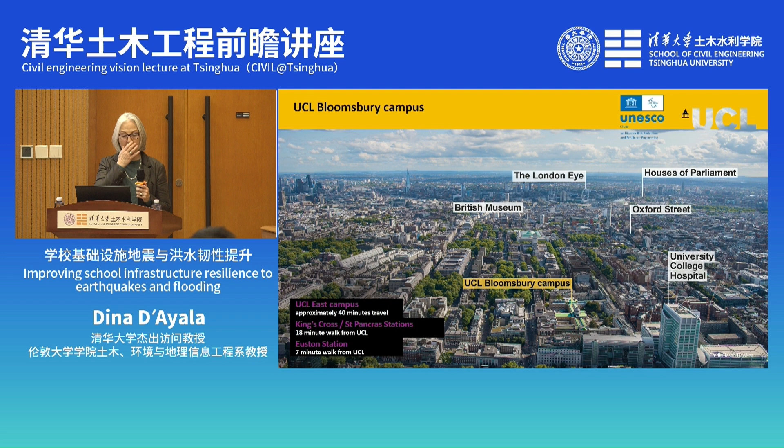Let's come to the Faculty of Engineering, which has many remarkable similarities to Tsinghua's Department of Civil Engineering.

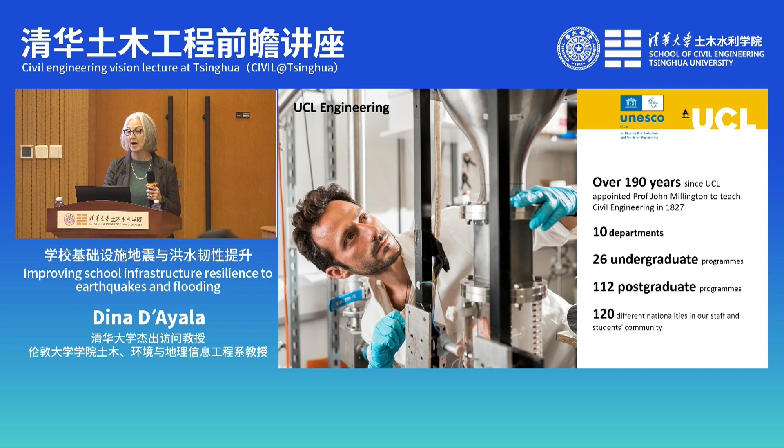The Faculty of Engineering Sciences is over 190 years old. The first professor appointed in engineering at UCL was a professor of civil engineering, tasked with improving urban conditions—especially the roads and the sewage system for public health. It now has 10 departments, 26 undergraduate programs, 112 postgraduate programs, and more than 120 different nationalities—quite an international outlook.

In Civil, Environmental and Geomatic Engineering, we have a diverse academic group of about 70 staff, covering structure and infrastructure design—as in my case—through to transport, circular economy, disaster risk reduction, and the more traditional hydraulics, geotechnics, and so on.

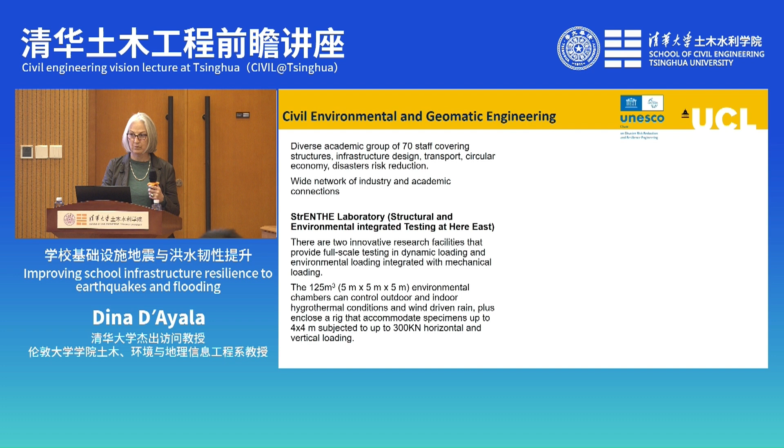We have a wide network of industry and academic connections. Over the past five years I had the pleasure of setting up the StrENTHE Laboratory—structural and environmental integrated testing—at Here East. This is quite an innovative facility because, for the first time, we bring together environmental conditioning and testing with mechanical testing, as you can see in the green frame.

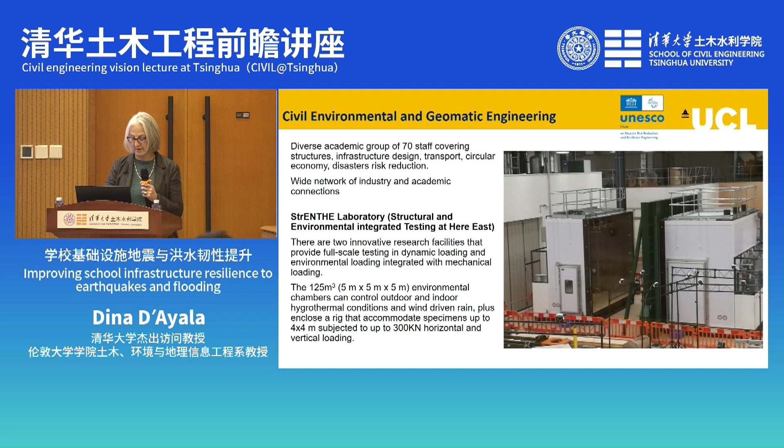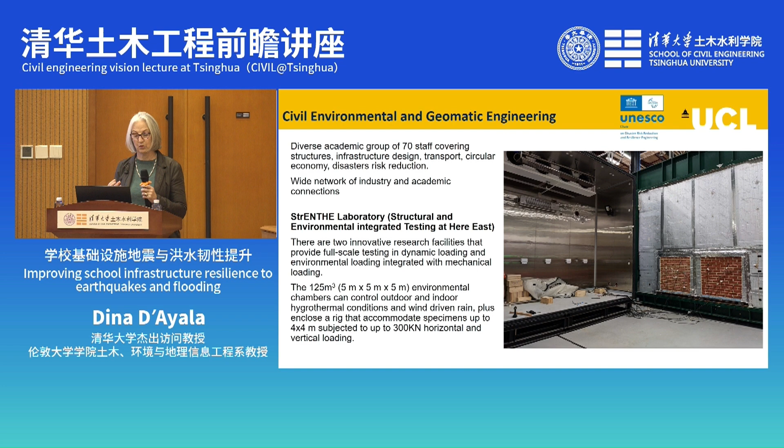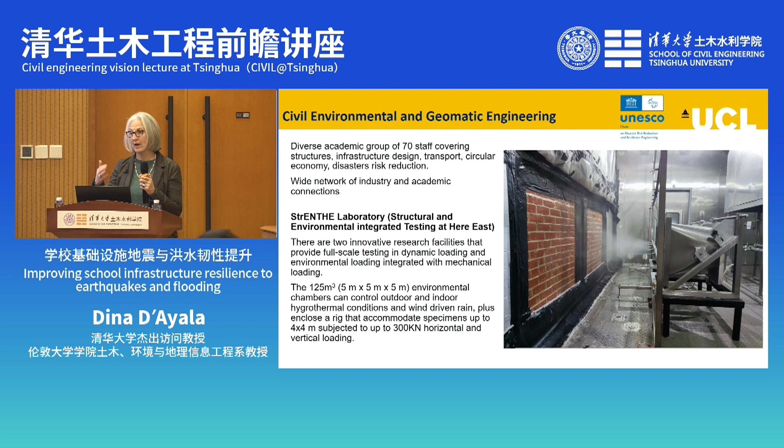If you open these two frames, you see something like this: two environmental chambers that can control both outdoor and indoor hygrothermal conditions, and also produce wind-driven rain, plus accommodate specimens up to 4 meters that can be subjected to up to 300 kilonewtons of horizontal and vertical loading. Very small compared to your new facilities here, but still significant for London, where there was previously no facility like it—quite large structures that allow us to test full-scale structural elements.

Another element: we are also very concerned with sustainability and sustainable structural engineering. So next to the chamber, we also have this rig, which is very large.

It's 9 meters long by 4 meters wide, and has 4 servo-hydraulic actuators, which can transfer up to 1,200 kilonewtons, doing high cycle fatigue testing. We can run several tens of millions of cycles to test new sustainable composite structural systems with low carbon footprint.

So what you see there, for instance, is a composite of steel and cement-free concrete deck. But also we test stone and timber composites, and this is the work of my colleague, Professor Wendel Sebastian.

Out of the activity and the research that we do in this laboratory, we have set up an MSc in Sustainable Structural Engineering. This is the first year that the MSc is running, so for those of you that intend to come and study more structural engineering in the UK, please have a look at it.

This course will provide you with the skills required to lead the design of safer, more resilient, and smarter buildings. The teaching is industry-led and design-based, and you will explore structural engineering within the climate emergency context, the net zero issues, well aligned with the UN Sustainable Development Goals.

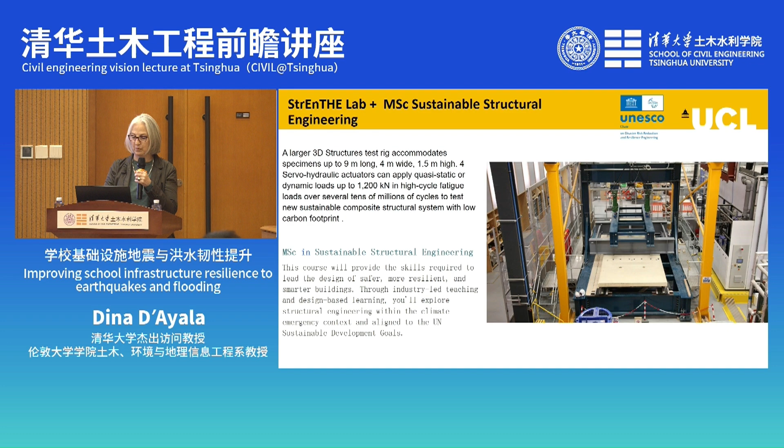The type of teaching that we do within the civil engineering department is a bit different from many more traditional civil engineering courses. For instance, an undergraduate course that I contributed to developing with colleagues from the architectural and environmental engineering faculty is the MEng in Engineering and Architectural Design.

This is the first course of this type as an undergraduate degree in the UK. We have the 3 disciplines in 1 degree, and it lasts 4 years. It's an integrated design program which combines architectural knowledge, creativity, and vision with evidence-based structural and environmental engineering.

What is very important is that the graduates of this course are then able to become either architects, civil or structural engineers, or building services engineers, or what is currently very topical in the industry, at least in Europe, facade engineering, i.e. the integrated way of making a building breathe and stand at the same time.

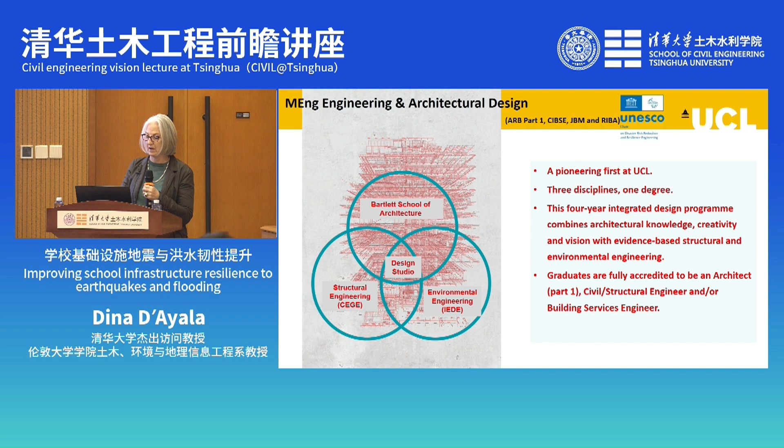So this is a bit of an overview of what we do at UCL. I will now introduce the UNESCO Chair, which both Professor Dongping and Professor Qingchen Lu already referred to.

The UNESCO Chair was initiated in 2021. It's called the UNESCO Chair on Disaster Risk Reduction and Resilience Engineering, and tries to develop effective methods to assess and mitigate the risk of damage by natural hazards to existing and new school buildings. In this way, the Chair contributes to improving equity of access to safe learning environments for children in vulnerable communities by ensuring continuity of education services, reducing lost school days and lost lives at school.

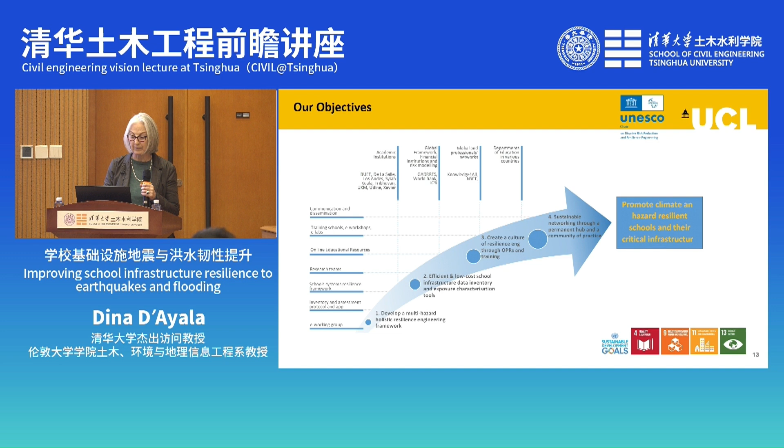The idea is that we promote climate and hazard resilience in schools and their critical infrastructures. So the first objective is to develop a multi-hazard holistic resilience engineering framework. Some of you might know the Global Alliance for Disaster Risk Reduction and Resilience in the Education Sector.

This organization brings together, for instance, the UN, UNESCO, the World Bank, but also the Red Cross and so on, and other global organizations, and has issued the Comprehensive School Safety Framework, which along with the Sendai framework tries to bring more safety and security to the education sector.

So the first pillar, which is of particular relevance to engineers, is safer learning facilities. If we look at the way that we define risk in structural engineering, considering the hazards, considering the vulnerability, and considering the exposures, then if we can quantify risk, we can then deliver resilience.

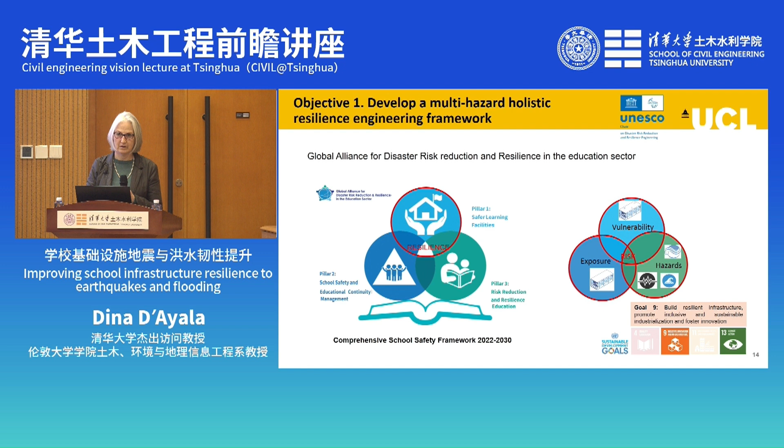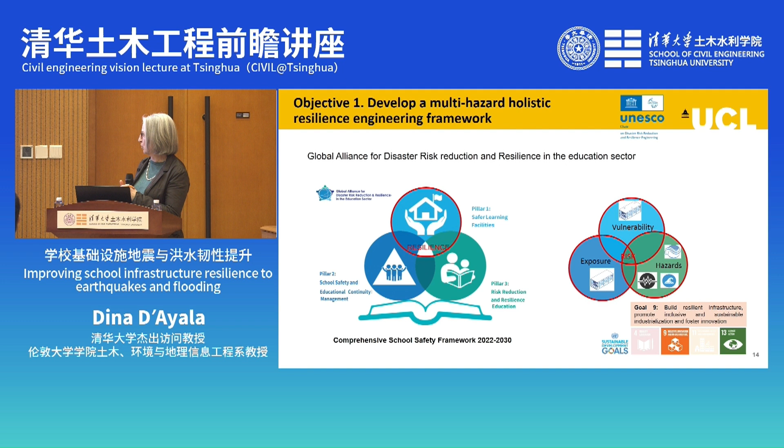That's the framework within which we try to work, and this framework helps us achieve Sustainable Development Goal number 9: build resilient infrastructure and promote inclusive and sustainable industrialization and foster innovation.

The second objective of the Chair is to develop efficient and low-cost school infrastructure data inventory and exposure characterization tools, and we have done this by collaborating quite extensively with colleagues, especially in the Philippines. Again, it's a long-term collaboration since 2017 with a number of different projects.

We try not only to characterize and minimize education disruptions, but also to build affordable and accessible decision support tools that local communities can use to look at what resources they can use locally in order to improve the behavior of their schools.

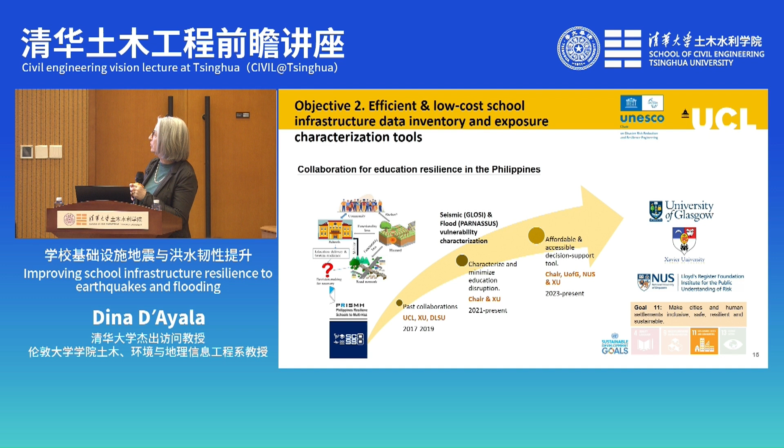And we have done this collaborating with the Lloyd's Register Foundation, Xavier University in Cagayan de Oro in the Philippines, and the University of Glasgow.

The third objective is to create a culture of resilience engineering with online resources. Since the inception of the Chair, which is almost at the end of its 4th year, we are 6 months away, we have run 35 webinars in 36 months. In fact, one of the webinars was delivered by Professor Dongping and Professor Nan a few months ago in the first term. All these webinars are also available online on our YouTube channel, so people that have not had the opportunity to listen to them live can go back and learn from it.

This leads us to our fourth objective, which is sustainable networking through the permanent hub of a community of practice, which we are now developing with more than 3,000 people from almost 100 different countries attending those webinars and continuously commenting. We try to hold the webinars once a month at lunchtime in UK time, which is evening in the east and early morning in the west, so that everybody can possibly link in, and you are all welcome to attend. They are open to everybody, and open for discussion afterwards.

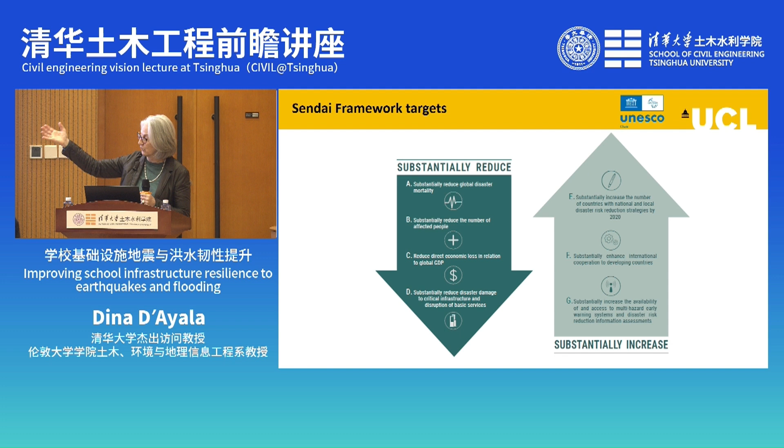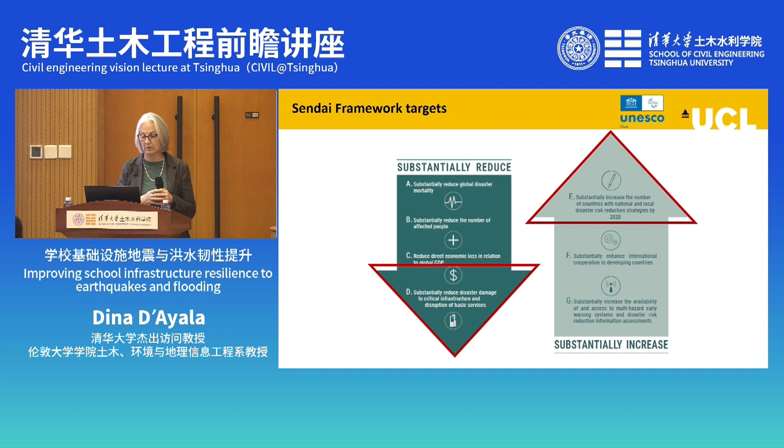Of these targets, today I will briefly refer to targets D and E, which are particularly relevant to the issues of risk reduction and resilience in the education sector. Target E talks about the number of countries that adopt and implement national disaster risk reduction strategies in line with the Sendai framework for disaster risk reduction. The second target is the percentage of local governments that adopt and implement local disaster risk reduction strategies in line with national strategies. So first the national strategies, then the local strategies, using information provided at the appropriate level of government below the national level with responsibility for disaster risk reduction.

The D target is about reducing the number of destroyed or damaged educational facilities attributed to disaster. So you see the Sendai framework has quite specific information about the reduction of damage to school infrastructures.

By doing this, we can fulfill mainly the first 3 sustainable development goals, 9, 11, and 13, but by fulfilling those goals we also reduce poverty and improve quality of education. If the infrastructure is better, we will have better clean water and sanitation within schools, better affordable and clean energy, and people with better education will have better work and economic growth, which will then lead to peace, justice, and strong institutions. So the sustainable goals are always strictly connected to one another.

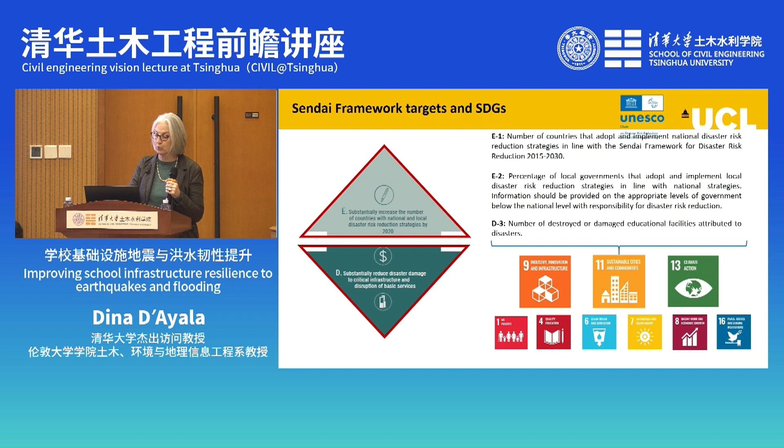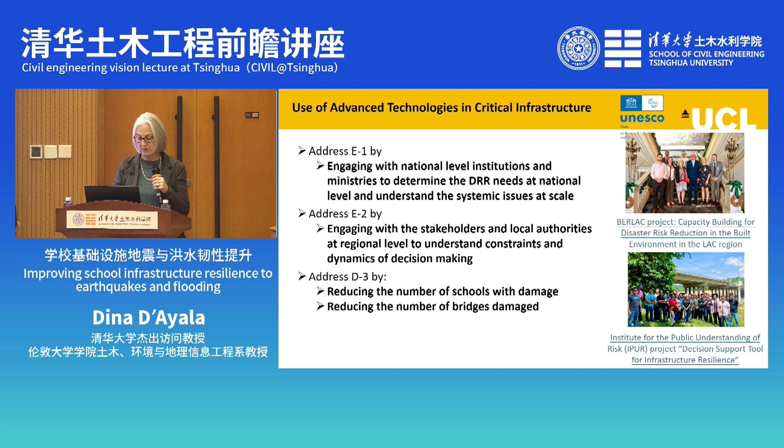What do we do with the UNESCO chairs and with the use of advanced technology to assess critical infrastructure? We try to engage with national level institutions—for instance, in the Dominican Republic, directly with the government through the BERLAC project—or with stakeholders and local authorities through projects in the Philippines. We address this by looking at ways of reducing the number of schools and bridges that are damaged, as we will see in a minute in our procedure.

What is the global framework? Besides the Sendai framework, I already mentioned the Comprehensive School Safety Framework in the previous speech, and again I draw your attention to Pillar 1. So let's go a little bit more into detail on this.

Pillar 1 is about safer learning facilities, and in particular safer and greener facilities that are built according to codes and standards. So it's very important that nations have standard codes, that there is construction quality control, that there is assessment and intervention for existing buildings, and that water, sanitation, and hygiene are also addressed.

The interaction between Pillar 1 and the other pillars also provides structural safety education, so people are educated to think about structural safety, building maintenance, and non-structural mitigation such as fire safety. By fulfilling these objectives, we really build child rights and resilience in the education sector. But to do that, we need to look at the existing building stock in the school education sector.

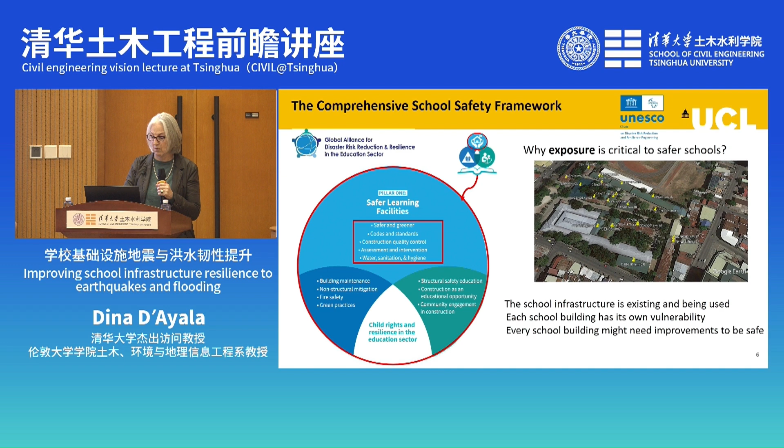But on the other hand, the school infrastructure already exists and is being used. Each school building might have its own vulnerability, and therefore every school building might need improvement to be safe. We need to quantify this. So what should we prioritize? Because clearly the resources at any given time will be modest or confined, and we won't be able to address the complete safety or renewal of school infrastructure at once in any country.

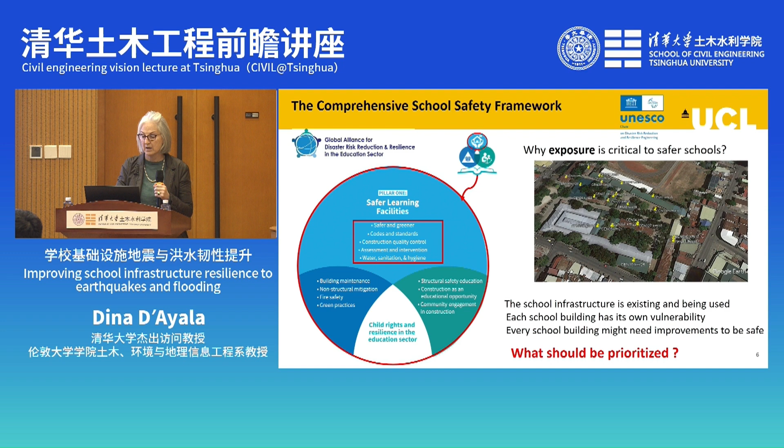So together with the World Bank, we developed GLOSI, the Global Library of School Infrastructure. The idea is that worldwide, schools typically have the same function as buildings from an architectural point of view, built in a very similar manner—a number of classrooms with corridors, connected together. So we can identify specific taxonomy or parameters that define each building from a structural point of view, and make a catalog of building types important not just for one country, but across many countries.

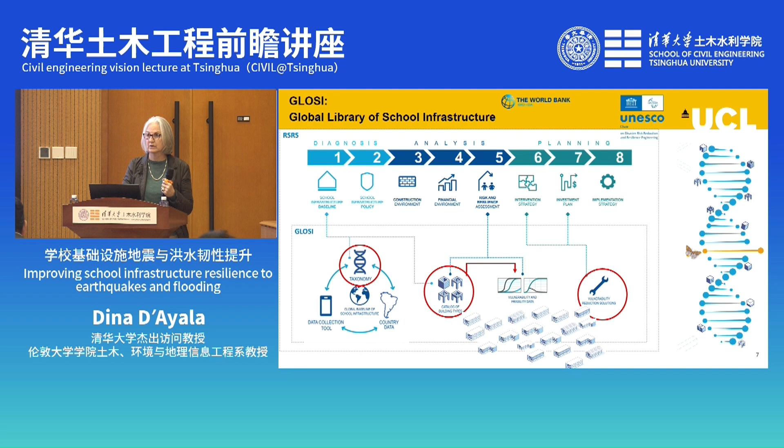Once we identify the building type using structural knowledge, we can identify the vulnerability and fragility data, and from that identify vulnerability reduction measures and solutions, quantifying them also in terms of cost. We can consider this taxonomy like the DNA of school buildings and school compounds.

But schools don't exist in isolation. For instance, if we look at this city, we can see a number of schools in the city center, with one further ahead. They are connected by roads and by bridges. If there was flooding here, clearly some of the bridges would be affected, creating a problem for pupils to get to school—and if a school itself is flooded, how can I move students to other schools?

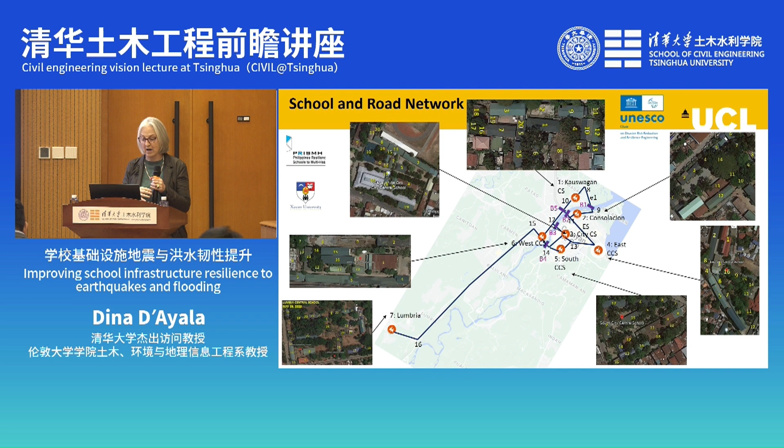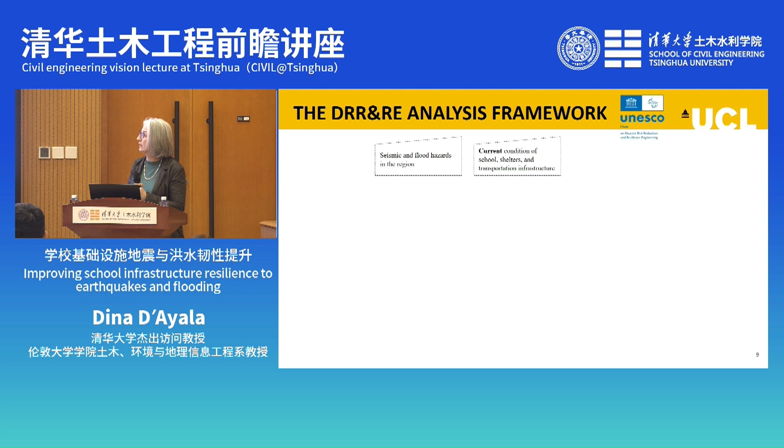At the same time, each of the schools has a different layout, different buildings, and therefore different vulnerability. So what is the disaster risk reduction and resilience engineering analysis framework we are talking about? First, we want this framework to work for different hazards—here we illustrate seismic and flood hazards, but it can also apply to windstorms, hurricanes, and typhoons. Secondly, we start from the current condition of both the schools, which are sometimes also used as shelters, and the transportation infrastructure.

We can then use Bayesian network and agent-based model, and I will explain in a minute how we do that, in order to determine the school resilience and therefore the education service disruptions. But we can also think of updated conditions and school shelters and transport infrastructures that can come from a set of pre-disaster interventions to improve the resilience of the system.

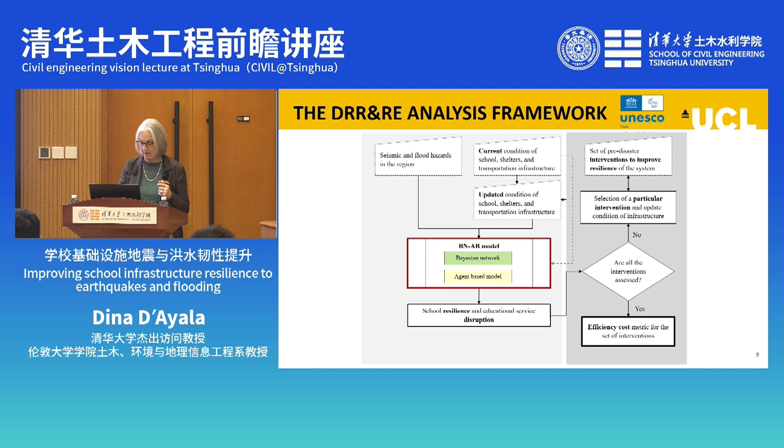So at each of these iterations, we can think if we can assess all the intervention possibly, yes. Have we identified efficiency cost metric for the set of intervention? Or if not, then let's look at selection of a particular intervention and start this tour again in order to improve the system. So in other words, how we are going to measure the effectiveness of the intervention. We can measure the effectiveness of the intervention in terms of recovery strategies.

If we look at this a little bit more in detail, we have a number of current infrastructure conditions which is affected by a hazard in the region. Now, the hazard is probabilistic in nature, i.e. we don't know where it will hit, when it will hit, with which intensity it will hit, but we can assume certain probabilistic distribution for each of these.

In the same way, for what concerns the assets, the school or the bridge or the road characteristics, we will have what we call fragility functions, but again, this will be probabilistic in nature. So we can use Bayesian networks, as we will see in a minute, in order to describe the uncertainty around the problem. We are then interested in knowing, after an event, in the current condition, what are the operational capacity state probabilities of each of the assets.

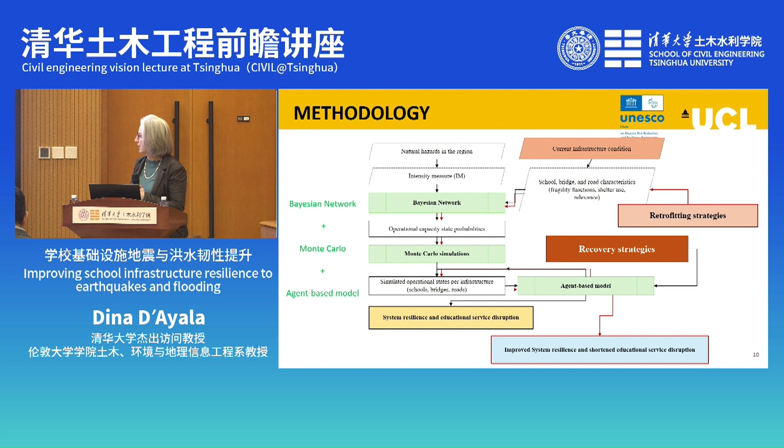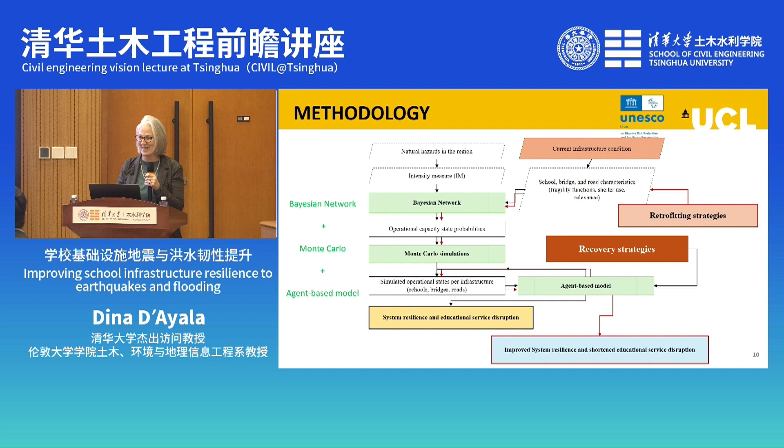But we can also bring in retrofitting strategies and then go through the same process and identify an improved system resilience and a shortened educational service disruption, which would also mean that, in extreme conditions, we will be in a position to save more lives. I will now try to illustrate a little bit more in detail this process, and then we will also look at an application very quickly.

So let's look at the Bayesian network first. The Bayesian network is a probabilistic directed acyclic graph where nodes represent variables and edges represent causal dependencies among the variables. The dependencies are quantified by the conditional probability of each node given its parents in the network.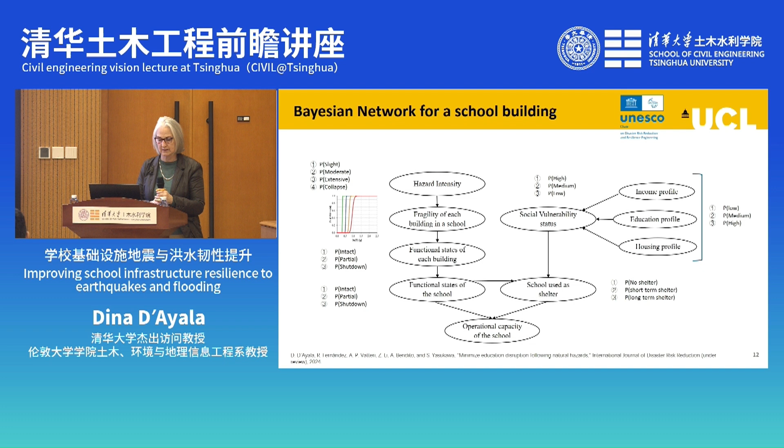I will have hazard intensity that, for simplicity here, we will consider as a non-probabilistic measure. So we will choose a particular scenario, and for that scenario, we will have a certain intensity at the site. Then, for that intensity at the site, through the fragility functions, the school will have at least 4 different probabilities of being in a given damage state. Given that probability of being in a physical damage state, I can then consider the functional states of each building, so whether it's intact, partial, or shut down.

Given the number of buildings in the school with this different probability of being intact, partial, or shut down, I can then consider what is the state of the school. The state of operational capacity of the school, i.e. the possibility of delivering lectures, will not depend only on its functional states, but will also depend on what we call the social vulnerability status of the community that is related to that school.

So if we look at the local community, we can look at the income profile, at the education profile, and the housing profile, for instance. These are just 3 indicators, but we can use other indicators. Depending on the level of these indicators, we can imagine that the social vulnerability of the community has different heights. For instance, if I have good houses, good education profile, and good income, I will react to a disastrous event in a different way than if I have a poor house, which might be directly affected by that event, and I don't have economic resources to, for instance, access a different shelter.

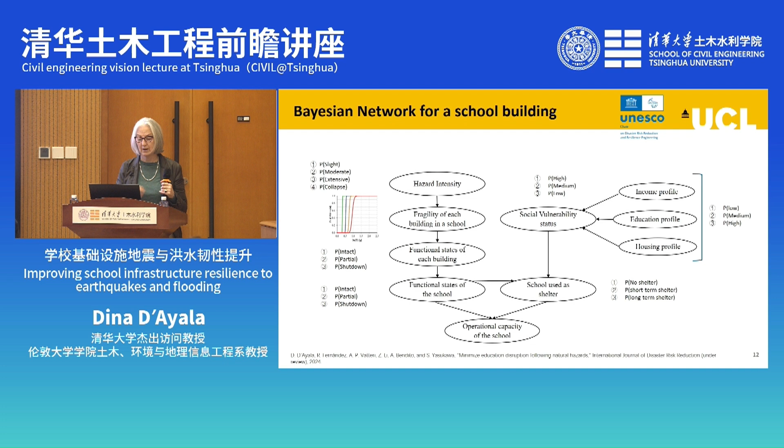So I will need the school as a place where I need to shelter for a certain amount of time until my home is going to be recovered. Then, if the school is used as a shelter, very often it cannot deliver lessons. It cannot be used for educational purposes. So by integrating these two elements, we can have the operational capacity of the schools. And this can be quantified in these terms.

So for instance, here we are considering two different scenarios. We are considering 12 different combinations of schools, which I will go into a little bit more in detail in the following. Oops. And it will give me different extremes.

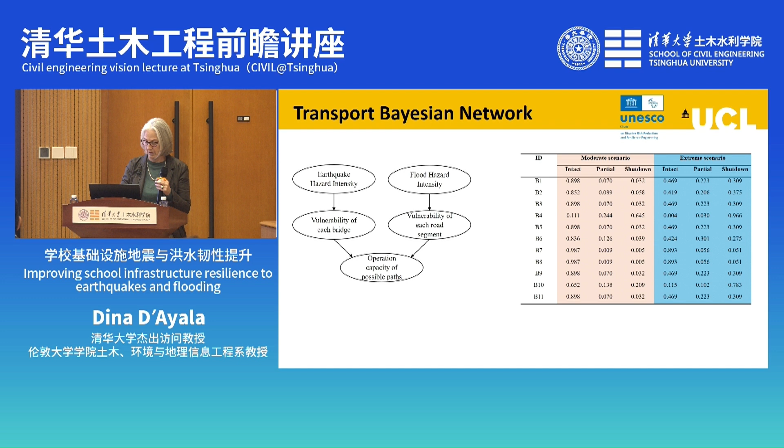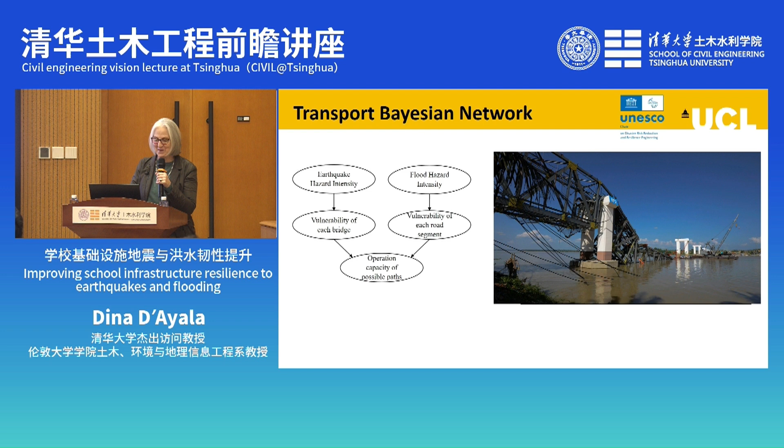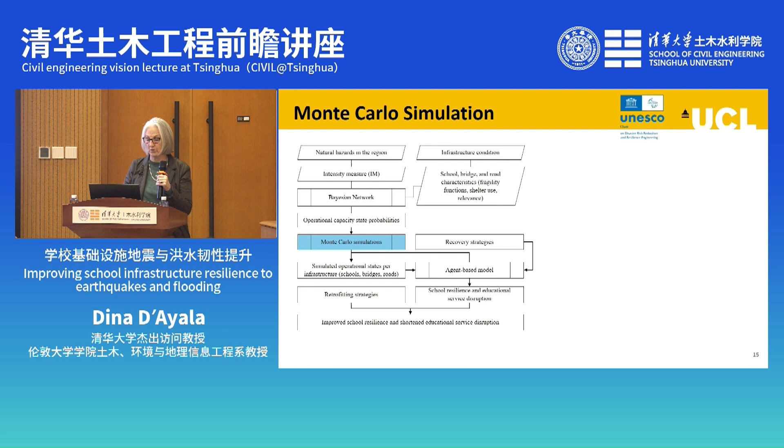So let's move on to the Monte Carlo simulations. So with the Monte Carlo simulation for this table of probability that you have seen in the previous slides, depending on the number of simulations, we will have different states and different combinations of the states for the system, for each of the schools. So this can be summarized in terms of probability distributions here. And as I said earlier, the larger the number of simulations, the more this probability distribution will tend to the probability distribution that we have looked at for the Bayesian network.

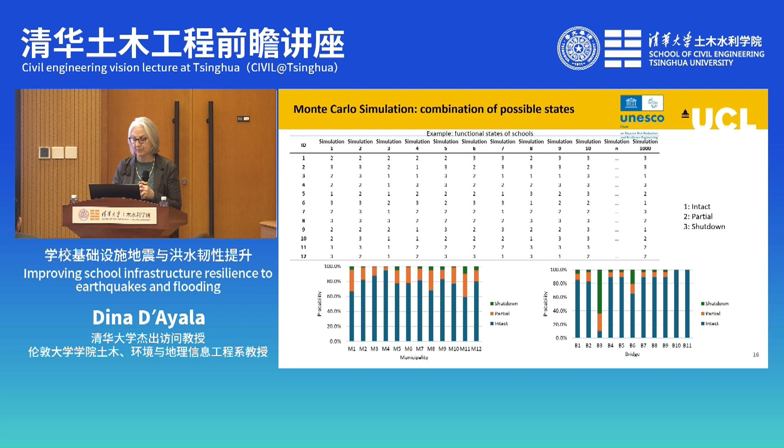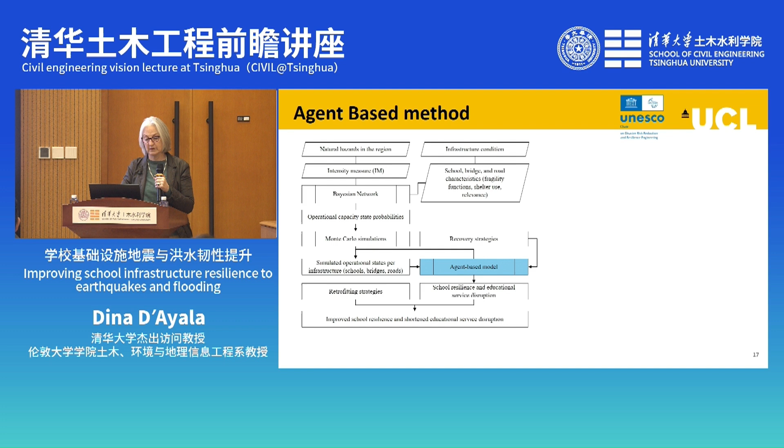Now, in order to understand how the recovery works, for each of these simulations, we will need to run an agent-based model. So if we have 1,000 simulations, then the agent-based model will have to run 1,000 times. And how does the agent-based model work? So the agent-based model works with two different agents. One that strives to retrofit the schools in the most efficient way, and one that strives to retrofit the bridges in the most efficient way.

But as you can see, I think there is a pointer here. Does it work? Maybe not. Can you see it? No. Maybe it's this way. No. It doesn't matter.

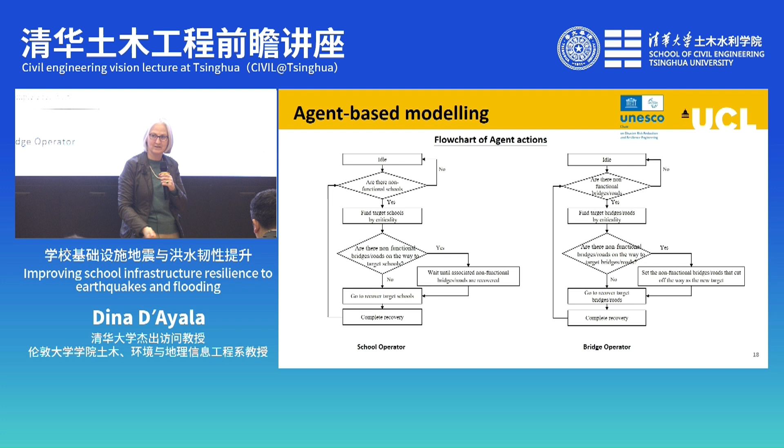So as you can see here, the agent for the school needs to wait until the bridge is fixed in order to go and recover the target school, i.e. if the road is broken and it cannot pass, then it cannot proceed. So for each of the school operator and bridge operator, the target is to find the next school by criticality, and by criticality we understand ranking of the schools and the bridges in different terms that we will see in a moment. But also the two agents are forced to interact with each other.

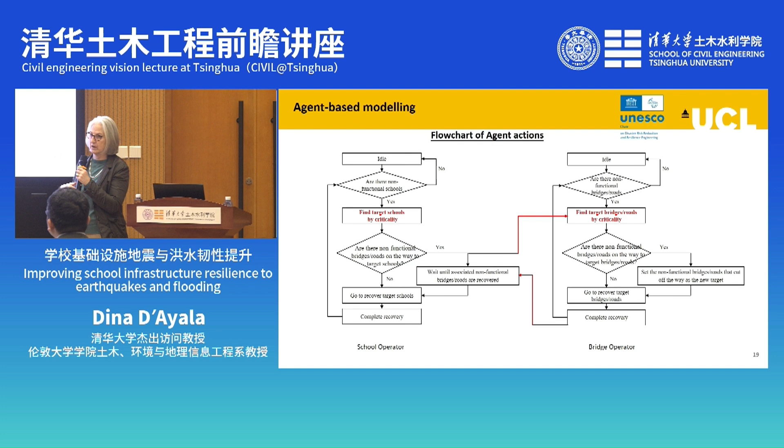I.e. one will need to complete the recovery and wait until that recovery is completed to unlock the next school that can be recovered. Or, in the other direction, the school operator can inform the bridge operator that he needs a particular bridge to be opened in order to recover the school. So he can influence the activity of the bridge operator.

So as I mentioned, we do this 1,000 times, and then we have a very wide distribution of the time to recovery in a moderate earthquake or in an extreme earthquake. As you can see, there is quite a dispersion there. But for the purpose of thinking about this, we can then use the median of that dispersion. So in the rest of the analysis, we will use these median curves. So now I'm trying to apply these concepts to the case studies.

And for these case studies, we have considered this wonderful place, which is San Pedro de Macorís, a province in the Dominican Republic. And the Dominican Republic is a country in the Caribbean which is affected by both earthquake. It's next to Haiti. You might have heard already of the several earthquakes in 2010 and 2021 that affected Haiti quite strongly. The Dominican Republic also had a strong earthquake in 2011. It has not had recent earthquakes, but it's very earthquake prone. And also has floods and hurricanes affecting it.

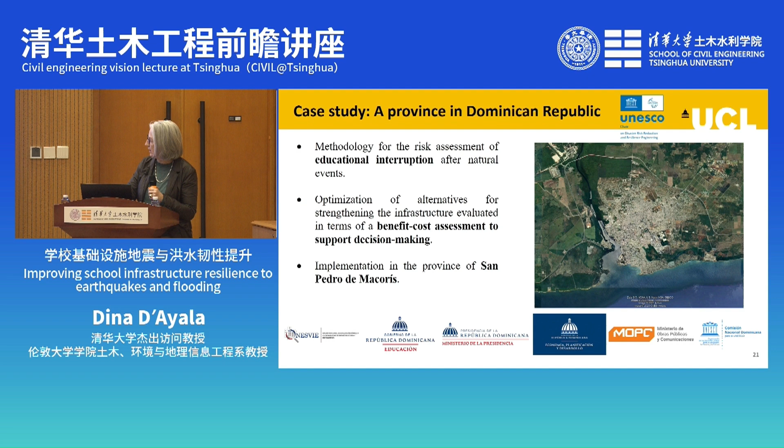So the idea is to identify the educational interruption that comes from natural events and to optimize alternatives for strengthening of the infrastructures, evaluated in terms of the benefit cost assessment to support decision making. So as you can see down here, in order to achieve this, one needs to work quite a lot with a number of governmental institutions in order to obtain the fundamental data that is necessary to run similar analysis.

So here, just some very simple statistics of this area. This is the distribution of the schools. There is a concentration in the cities, in the San Pedro de Macorís cities in the southern part of the picture on the left. And you can see that then in the region they are much more dispersed. There are almost 400 school facilities for about 1,000 buildings and about 100,000 students.

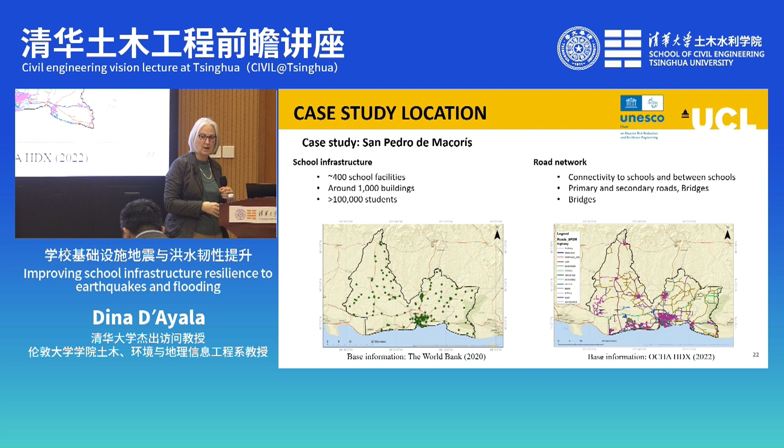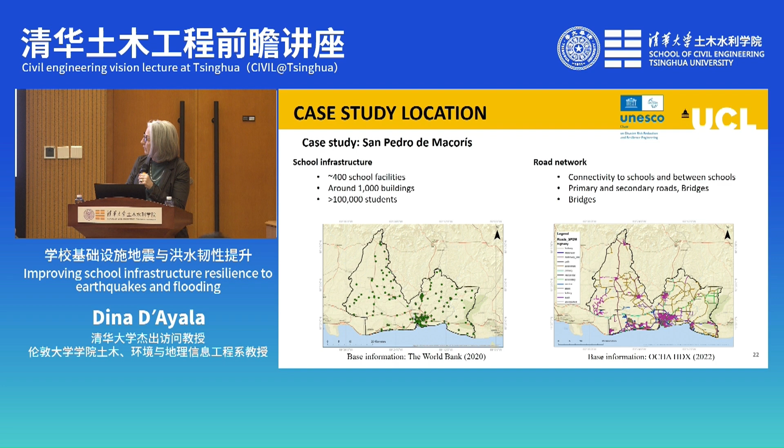And this is the connectivity in the country, in the region. And again, we can see that there is a majority of roads here in the cities, but then when we go outside the cities, there are very few roads, and these roads are also not necessarily very resilient, very strong roads. So some of them are secondary or they are not tarred and so on. They are not highways and bridges.

So if we look at it from the point of view of simplifying the network, for each of the municipalities in the region, we identify a different node, and we identify the distances. Here we just schematically indicated them as linear, but of course we take the actual length among them.

And you can start seeing the different types of buildings that constitute the schools. What is interesting is, of course, that in each region, and you will know this by experience also going to school yourself, there is a finite number of school typologies. Yes, so buildings tend to be the same, more or less. And that helps us a lot when we are defining the vulnerability of these buildings, because if we analyze one, and that's where the GLOSI approach comes in.

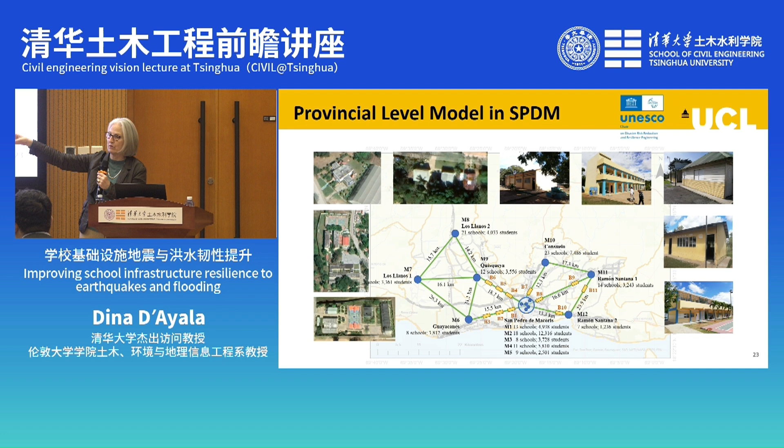But there are also a number of bridges that here are indicated in yellow. And these bridges are critical connections between the different nodes. Also, because San Pedro de Macorís, the city, as we have seen earlier, has a concentration of population with respect to the other smaller towns, we have subdivided the number of schools into 5 different nodes in San Pedro de Macorís, so that each node more or less has an equivalent weight in the network.

And these are the different types of bridges, again, and they are quite different, as you can see. Some of the roads are very good, but some other roads are very basic, as we can see. But still, you know, they are critical communications. Sometimes the more basic they are, the more critical they are to actually connect the community.

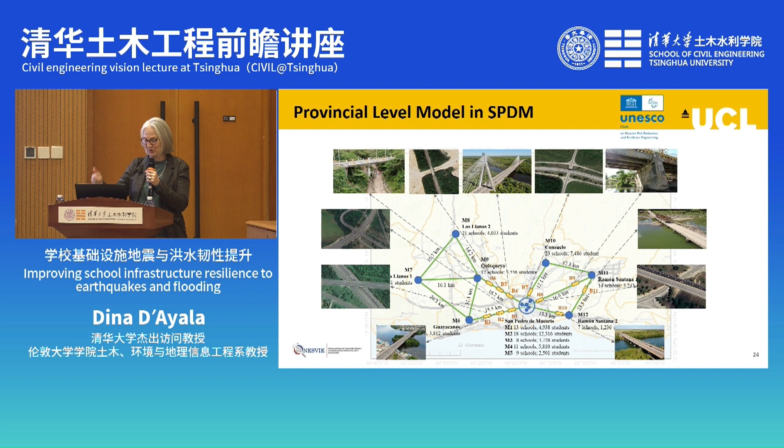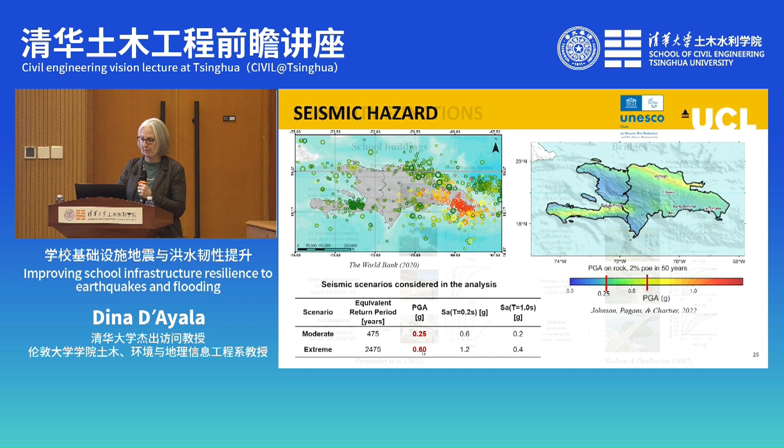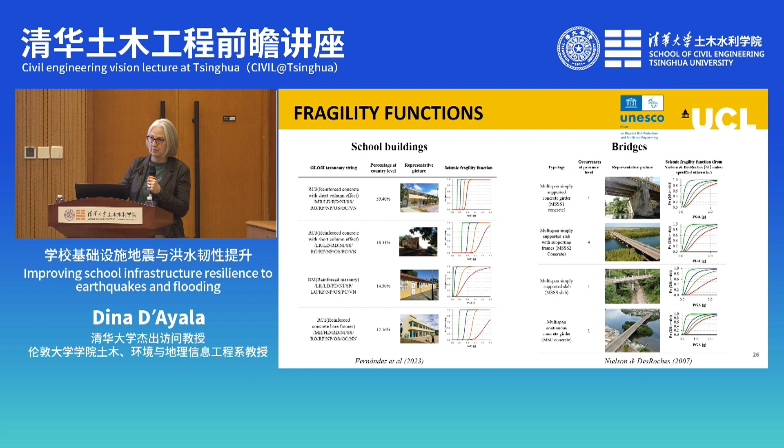So we then define the fragility functions for the different building types and for the different bridge types once they are classified. As I mentioned before, we then have the different Bayesian network outputs, where we can see that there are quite different percentages between the moderate scenario and the extreme scenario. And we can see that in the extreme scenario, a large proportion of all the municipalities will have schools in the shutdown condition.

And similarly for the bridges, we can see that in the moderate scenarios, most of the bridges will be intact, but some might have, like before, a quite high probability of being affected. And in the extreme scenario, of course, that probability of being affected increases substantially.

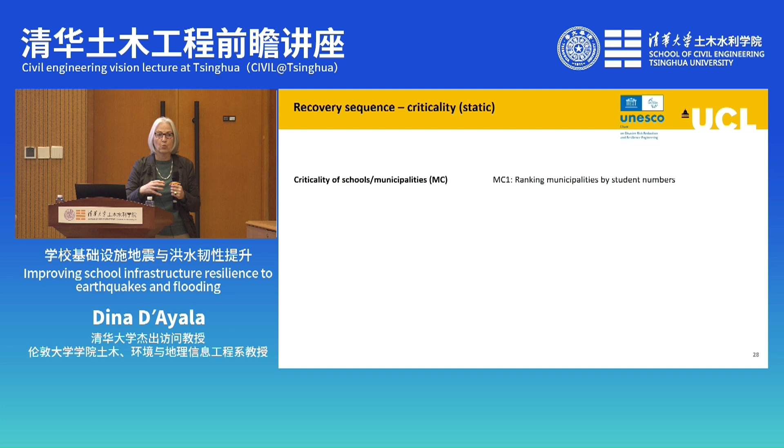We then want to see the criticality of school municipality for the recovery. So we have two possibilities. We can either rank the municipality by student number, so we might make the decision that we are interested in recovering the towns and cities where there is the largest number of students first. Remember, we have divided these municipalities so that the number of students is not different from one to the other.

That will mean that, for instance, I will first recover M2, then M10, then M4, and so forth. Or we can rank the municipality by school building damage states. So the probability I showed you before, we will look at the probability where there is the highest number of damaged schools, and then go to that particular municipality.

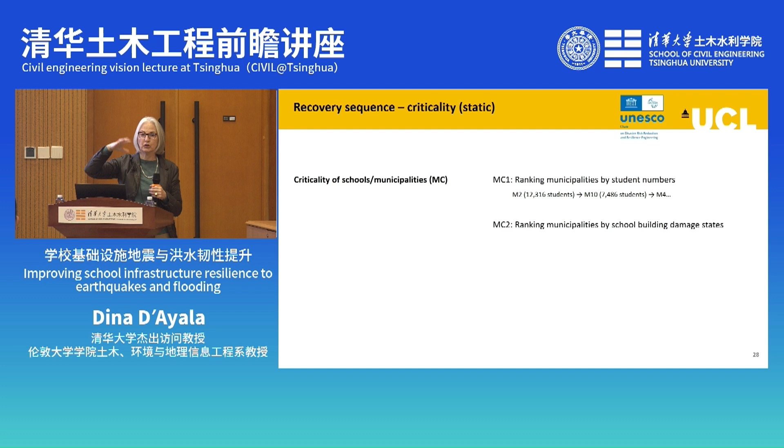But remember, because we are doing Monte Carlo simulations, if we are going with this analysis on the school building damage state, for each simulation, that distribution of probability of being in a damaged state might be different. So for each simulation, we might have a different scenario, and we will see the difference in the recovery curves. So then we will go first to the shutdown, then to the partial, then to the intact.

Similarly, we need to define a criticality for the bridges. So we can either think that the bridges can be ranked in betweenness centrality, which is a typical approach for studying graphs. The betweenness centrality of an edge in a network is a measure of how often that edge is part of the shortest path between two nodes.

So in that case, this would be the ranking, where B6, B5, and B4 are the most critical. B7 and B10 are the next criticality, and then B8 and B9 are the next criticality. Then we have B1, B2, B3, and B11.

Or we can rank the bridges following the recovery sequence of the school, which is what I was talking about earlier, i.e. the school, depending on the criticality of the school, then the bridge operator will need to go and recover the particular track that is needed to reach that municipality that we are going to work on.

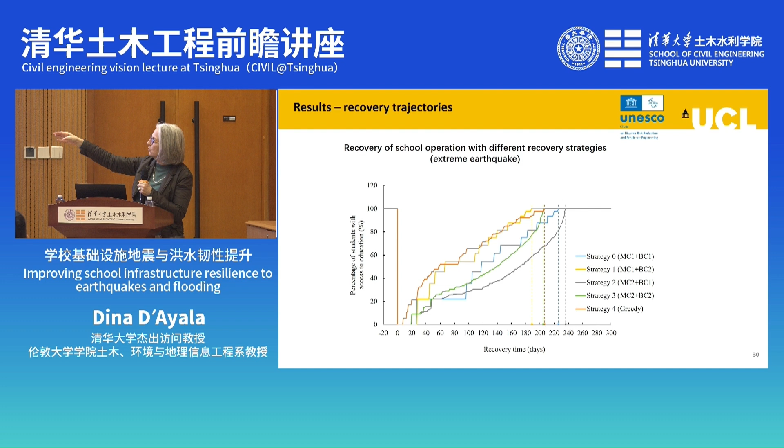But this is if we just look at the time of recovery. If we look at a typical resilience measure, which is the area underneath the recovery curve, then we find that although the total recovery is a bit delayed, strategy 4 still maximizes the resilience indicator.

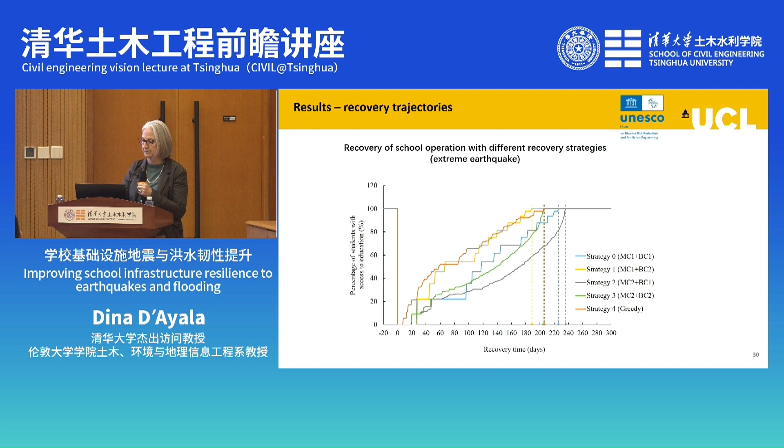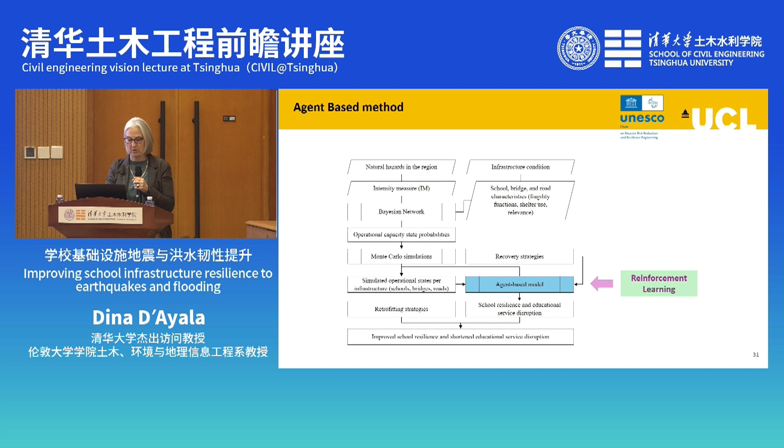And then we can consider a different way of using the agent-based method, also with reinforcement learning. This is particular studies that Dr. Sai-Shang Li has recently developed.

In reinforcement learning, we use an interdisciplinary area of machine learning and optimal control, which is concerned with how an intelligent agent should take action in a dynamic environment in order to maximize a reward signal. So the agent will look for an optimal recovery strategy rather than preset criticality.

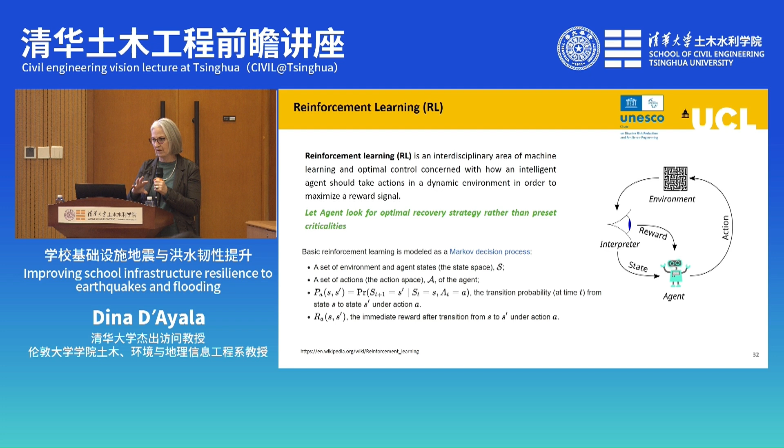The reward will depend on the Markov decision process. So we have a set of environmental and agent states, S, a set of actions and space, and we look for the probability of the best outcome, i.e. the transition probability at any time t from state S to S prime under a particular action. The immediate reward is a result of that transition, and in this case the transition is from the damaged state to the recovery state.

In order to apply the reinforcement learning here, we are just using the highest probability in the Bayesian network analysis. So this is a deterministic approach, not a probabilistic approach.

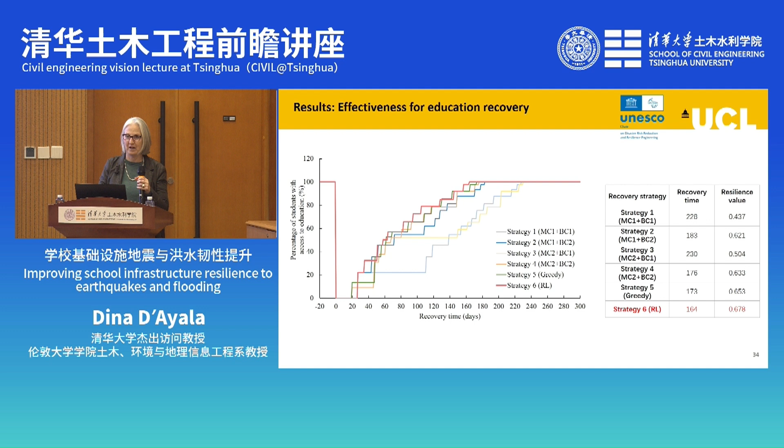We have considered here 6 different recovery strategies using technological and statistical analysis in our best possible way. But we haven't yet considered the retrofitting solution.

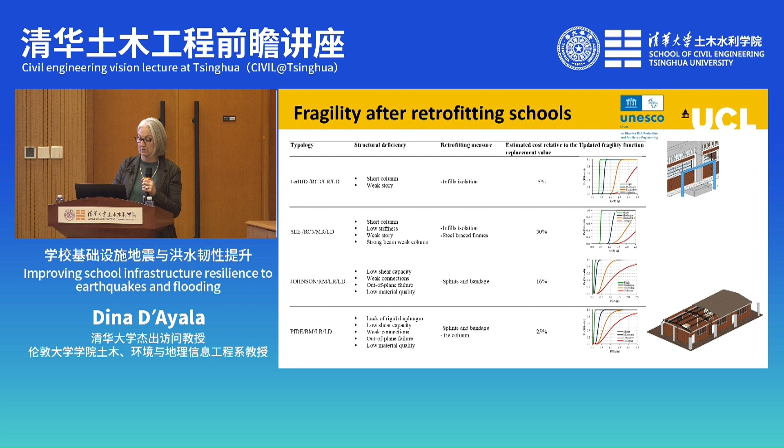So these are, if we consider different retrofitting conditions for the different building types, we can go a little bit into detail here, but it's not fundamental.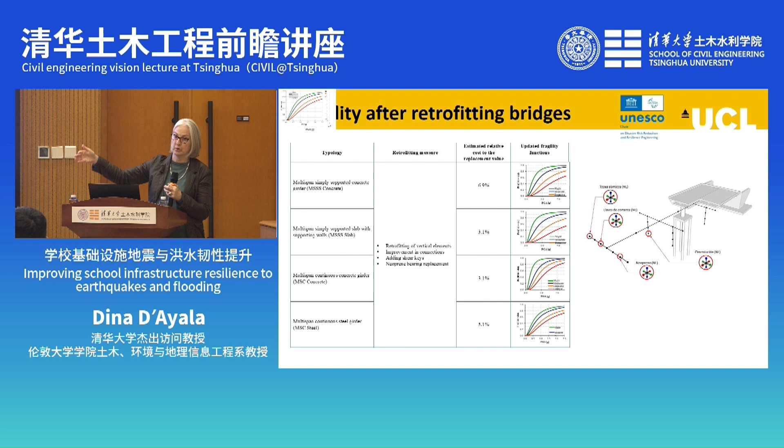So we will now have a new set of fragility functions which deliver a better performance towards the earthquake. We can do the same thing for the bridges, so we will have a better performance, if that's the case.

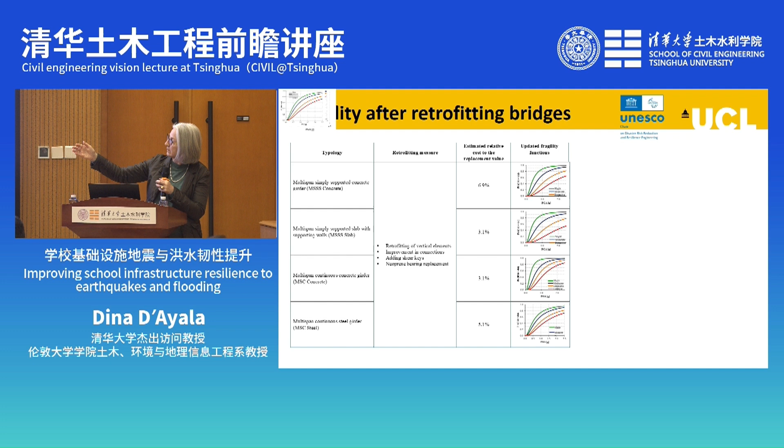And for each of these, you can see that we are also estimating the actual cost with respect to the new building.

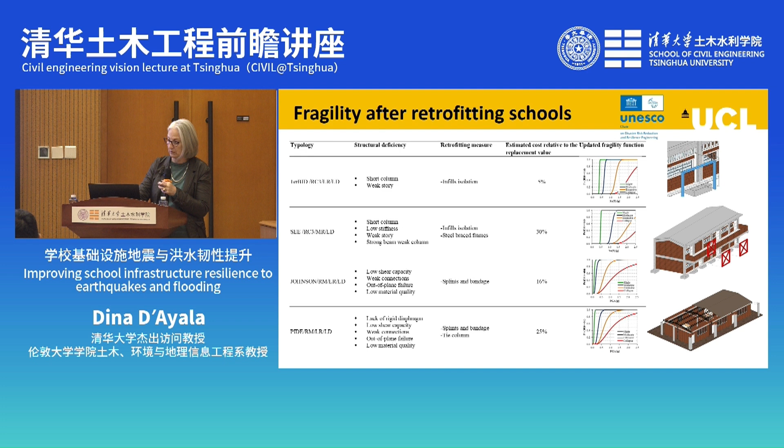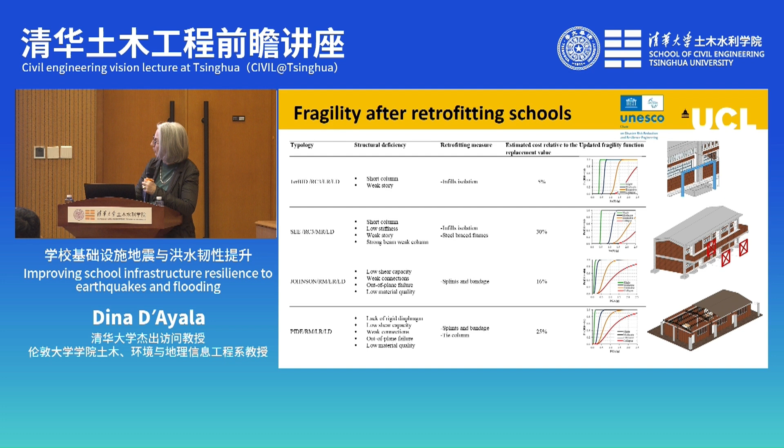Yes, so there will be some interventions that cost more than others. The first intervention, infill isolation, is only 5% of the replacement cost, but if we also add steel braced frames, then we go up to 30% of the replacement cost of the building, and so on. Sometimes the same intervention might actually cost more or less, as you can see, with respect to different cases. And similarly here for the bridges.

So now we also have an economic indicator of how much it will cost us to make the system work better. Okay, oops, I don't know what happened there.

So then we can look at the recovery of school operation with different retrofitting strategies. We can decide, and here we only use the greedy recovery approach, whether we retrofit only the school, only the bridges, or both. Of course, retrofitting only the school will cost less than retrofitting both, and retrofitting the bridges will cost less, and so on.

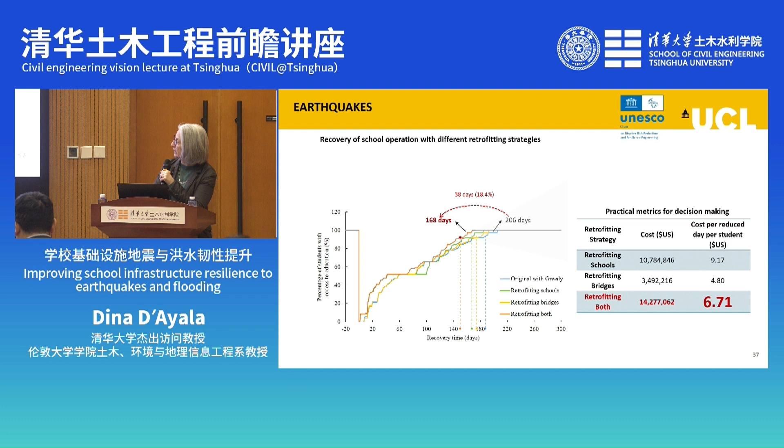I don't know why it keeps doing that. But we can see that we have a reduction from 206 days to 168 days, so 38 days less in terms of interruptions, a reduction of almost 20% with respect to those conditions. It might not seem like much, but it's basically more than a month of lectures less, so 5 weeks of lectures.

We can see that the cost per reduced day per student, although retrofitting both costs more, when we divide the total cost by the days gained, the cost per student per reduced day is actually less if we retrofit both the bridges and the school than if we only retrofit the school. One might argue we should retrofit only the bridges because it costs very little and benefits the students, but the issue is that retrofitting only the bridges doesn't save the lives of students from the event if they are at school.

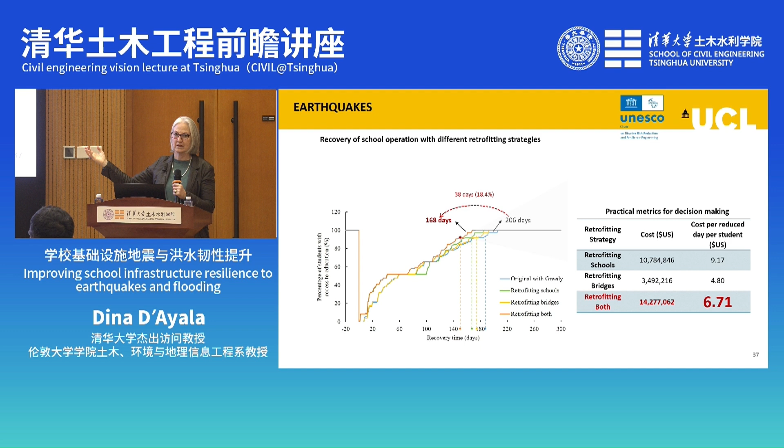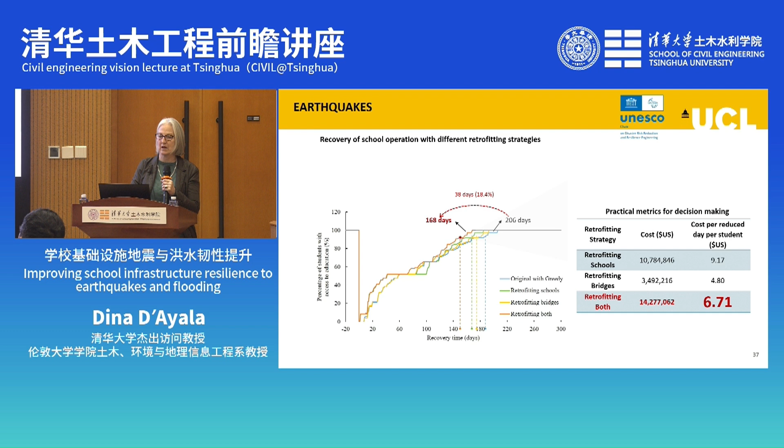So it's quite important to consider that. This metric is easy to grasp because it's less than $10 a day, and very often a family will spend that much money to send their child to school in bus fare, food, or clothing. So it's very comparable, and it becomes an easy way, from a policy point of view, to discuss investment at the local and national level.

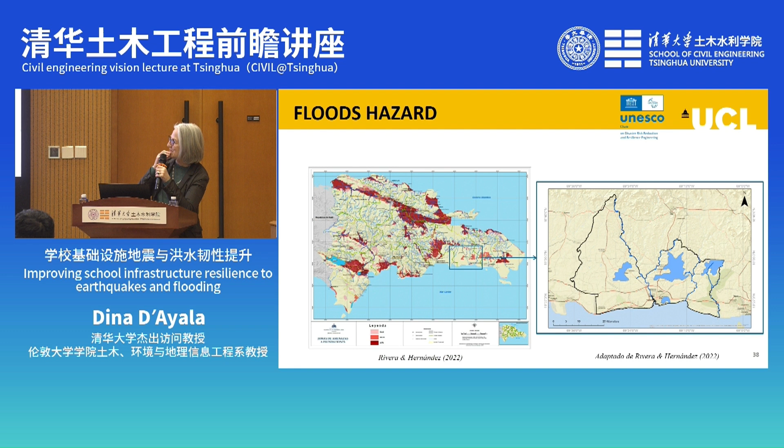Similarly for flooding, the flooding model is much more basic. We only have a susceptibility of flooding for this particular area. I'm almost done. These are the fragility functions for the floods.

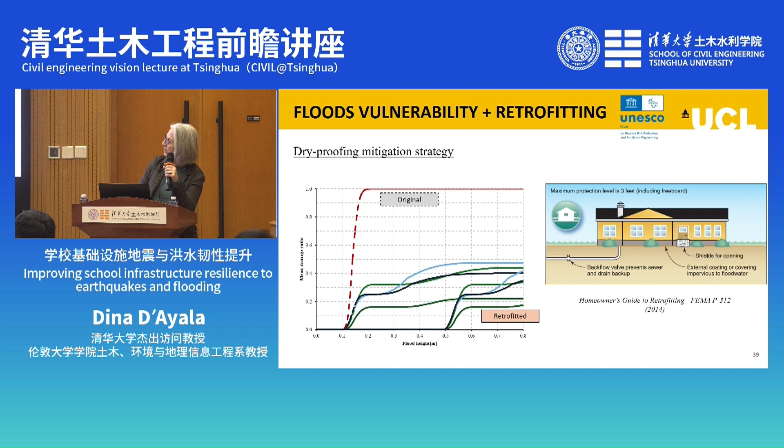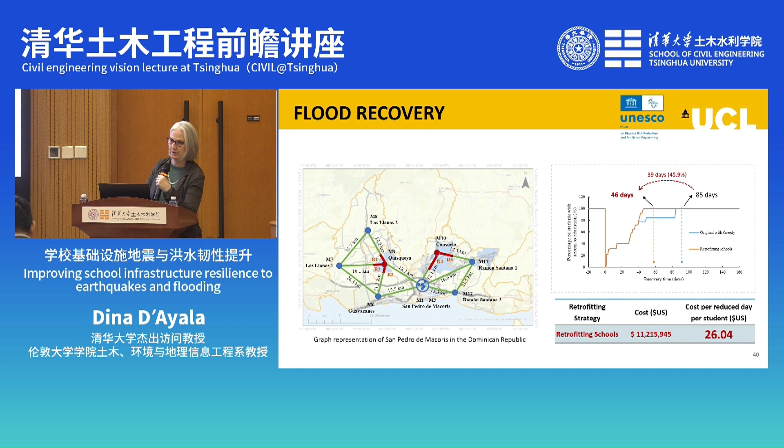So the probability of occurrence of the earthquake is much smaller than the probability of occurrence of the flood, which will probably occur 10 times more often, since this is the probability of occurrence in 100 years. So when we consider the length of time, this intervention is also very beneficial.

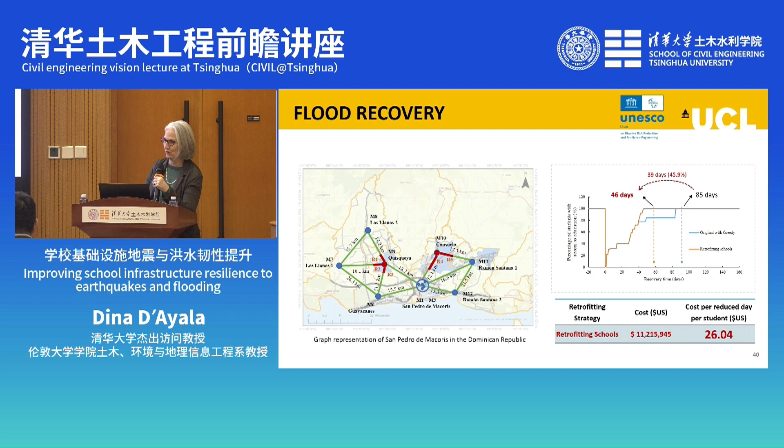In conclusion, since I've taken much of your time, the quality of the input information determines the quality of the results, and this is always the problem - how good is the data that we can put into the system? In our case, we've been working with the Dominican Republic and the World Bank since 2018, so we have a lot of data about the schools, but that's not always possible.

The model has several limitations which I'm not going to go into now, but it's a simplified representation of reality, of course. We have highlighted the numerous uncertainties in the process, and we need to understand that this is not an exact science, but it is sufficient to provide a framework to start thinking in probabilistic terms.

The main objective is to inform decision-making strategy based on disaster response policy at the local and national level. So it has two benefits: first, it highlights the vulnerability of the schools and the bridges, and then it's down to the politician to decide how to use their budget.

What is very important is that they can now do this with data, with some numbers, and with the ability to rank the different municipalities, as we have seen.